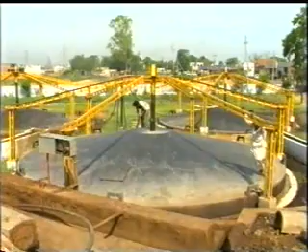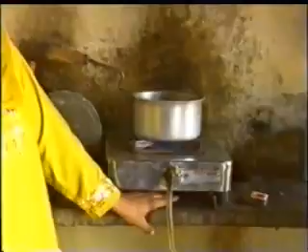With the rapid increase in population, there is a tremendous increase in the demand for energy resources to meet household needs in Indian villages. Still, about 60% of rural people depend upon traditional sources of energy, that is firewood, cow dung cakes, etc.

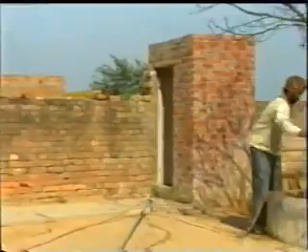Keeping in view the difficulties faced especially by rural women in meeting their energy demands, biogas technology can be an appropriate answer.

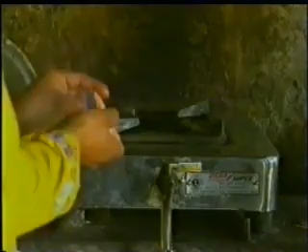Biogas technology helps us generate biogas from biomass, that is cow dung, crop residues, etc., which are available in abundance in rural areas.

Biogas is produced by anaerobic digestion. Anaerobic digestion is nothing but decomposition of cattle dung and other organic matter with the help of microorganisms in the absence of oxygen.

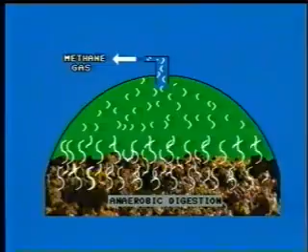Anaerobic digestion provides us methane gas for cooking, and in exchange for fresh-fed cow dung slurry in the plant, we get well-digested, valuable manure rich in nitrogen.

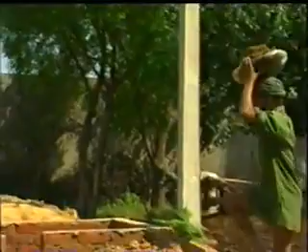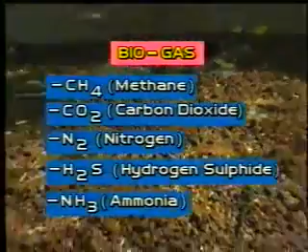What is biogas? Biogas is a mixture of methane, carbon dioxide, nitrogen, and some traces of gases like hydrogen sulfide, ammonia, and water vapor.

Biogas can be utilized for cooking and lighting, running diesel pump sets, and the outcoming slurry as manure in the fields.

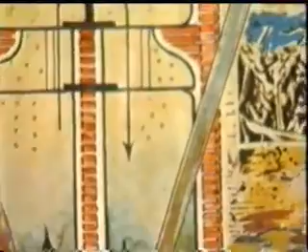On an average, biogas contains about 50 to 60% methane, 30 to 40% carbon dioxide, and traces of nitrogen, hydrogen sulfide, and ammonia. The digestion of organic matter can be done in two ways: batch digestion or semi-wet process, and continuous or wet process.

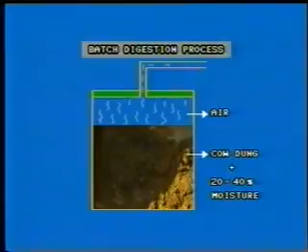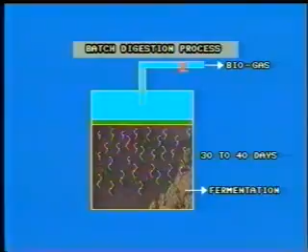Batch digestion. In the batch digestion process, the organic matter is filled in a suitable container along with some moisture. This container is then sealed to exclude air from it. The gas formation, which starts after 1 week, can be collected in centrally located gas holders and can be used for 30 to 40 days.

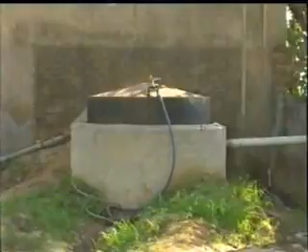Continuous process. In the continuous process, a single container serves as the digester. Each day, we add a required amount of fresh feed or slurry, and an equal amount of digested slurry comes out. It provides us gas continuously, and on the same principle, biogas plants work.

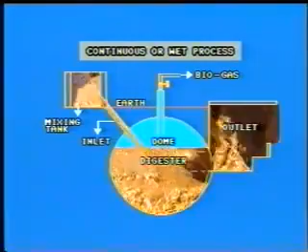Let us understand now what are the different factors that affect biodigestion: pH or hydrogen ion concentration, temperature, total solid content of the feed material, carbon-nitrogen ratio of the input material, retention time or rate of feeding, types of feedstock, stirring or agitation or mixing of the content of the digester, type of initial inoculum, and acid accumulation inside the digester.

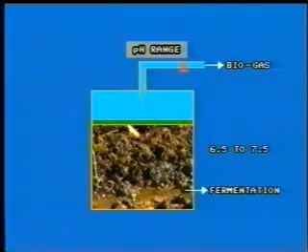Now let us understand these factors one by one. pH or hydrogen ion concentration: the digester is usually buffered if the pH is maintained between 6.5 and 7.5. In this pH range, the microorganisms will be very active and biodigestion will be efficient.

Temperature: the required temperature inside the digester for effective growth of microorganisms and biogas production is 20 degrees centigrade to 42 degrees centigrade.

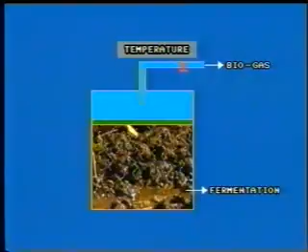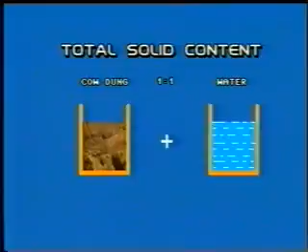Total solid content of the feed material: the cow dung is mixed with water, usually in the proportion of 1:1 by weight, to keep the total solid content about 8 to 10%.

Carbon-nitrogen ratio of the input material: the optimum carbon-nitrogen ratio is 30:1 for maximum microbial activity.

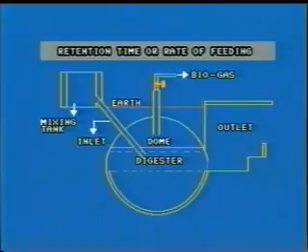Retention time or rate of feeding: the period of retention of organic matter inside the digester for complete digestion by the microorganisms is known as the retention period.

Retention periods for some feed materials are: cow and buffalo dung 50 days, night soil 30 days, pig dung 20 days, poultry droppings 20 days.

Type of feedstock: all plant and animal wastes can form the feedstock for a digester. However, woody materials are avoided to keep the process of digestion smooth.

Stirring, agitation, or mixing: breaking the scum or matted formation at the top of the digester is necessary for enhancing gas generation.

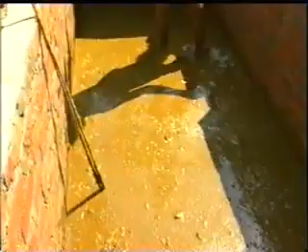Types of initial inoculum: the initial inoculum is the biodigested slurry collected from a well-established digester. It helps in providing a sufficient number of microorganisms.

Acid accumulation inside the digester: some fresh plant matter added in excess may produce acids as intermediate products. Avoid adding excess fresh plant matter inside the digester.

Some family size biogas plants are the floating gas holder, commonly called KVIC type, with 1 to 10 cubic meter capacity.

Fixed dome, commonly called Janta type biogas plant, with 1 to 6 cubic meter capacity. Pragati model with 1 to 8 cubic meter capacity. Modified fixed dome called Deen Bandhu model with 1 to 6 cubic meter capacity.

The KVIC plant has a digester made of prefabricated ferro cement. The KVIC plant also has a gas holder made of fiberglass reinforced plastic with a 1 to 6 cubic meter capacity.

Flexi biogas plant with 1 to 6 cubic meter capacity, which is portable and made of rubber. Apart from this, community-sized biogas plants can be useful for a bigger community.

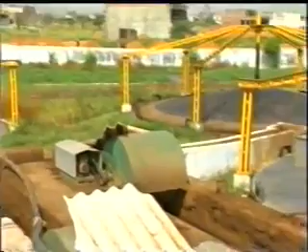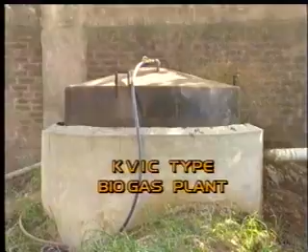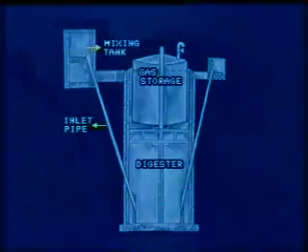Now let us understand the function and construction techniques of KVIC biogas plants. The KVIC, or Khadi and Village Industries Commission, type biogas plant consists of a mixing tank, an inlet pipe, digester, gas storage, center guide frame, outlet pipe, and an outlet chamber.

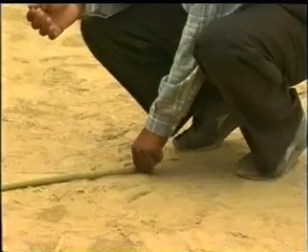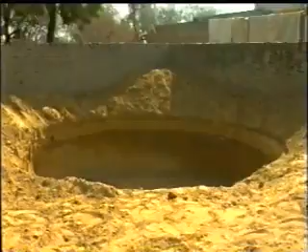Before construction, we select the right place for installation of the biogas plant. First, mark a line on the ground for digging a pit as per the size of the digester. For a 6 cubic meter capacity digester, we dig a pit of 10 feet diameter up to 8 to 10 feet depth. In order to lay a strong foundation, we do ramming of the brick bats with soil.

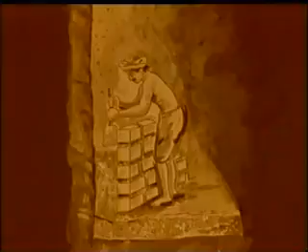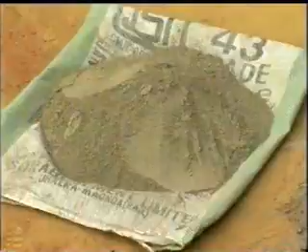The materials required are bricks, sand, stone chips, cement, and pipe for the construction of a digester, and we fix the center guide frame. An inlet and outlet chamber is constructed. The fabrication of the steel gas holder is done separately by a mechanic.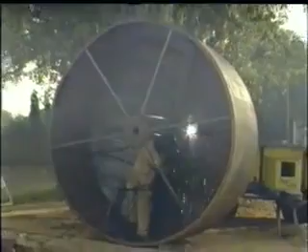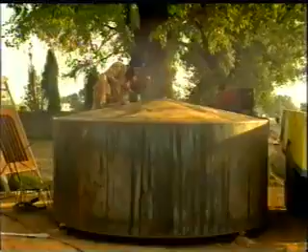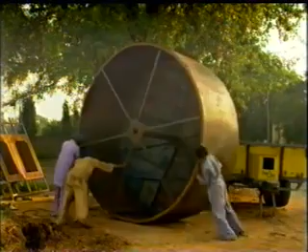Initial feeding with fresh cow dung slurry along with some digested slurry is done before fixing the gas holder into the biogas plant. We have here the views of a KVIC biogas plant user.

We are using biogas for cooking all items like chapati, dal, vegetable, milk, tea, etc. It is more useful than LPG. There is no danger in using this gas. The outcoming slurry is also used as good manure in the fields.

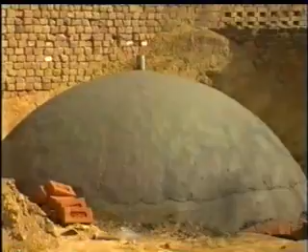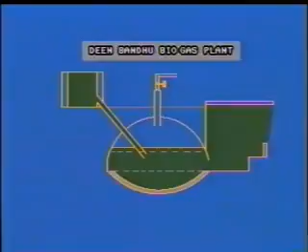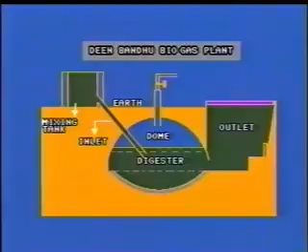Now let us understand the function and construction techniques of a Deenbandhu type biogas plant. It consists of a mixing tank, an inlet pipe, digester made of bricks, dome, and an outlet chamber. The digester cum dome is covered under the earth for its protection and to maintain temperature.

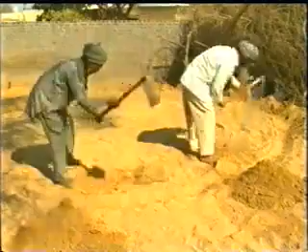Now for the techniques of its construction. First, we select an appropriate site and mark a line on the ground for digging a pit as per the size of the digester.

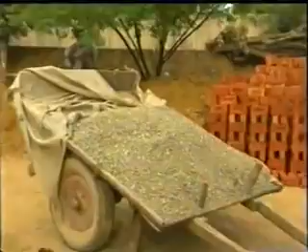Materials required for the construction are bricks, sand, stone chips, cement, and pipe.

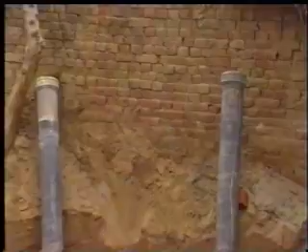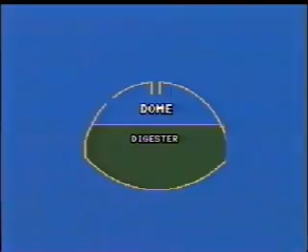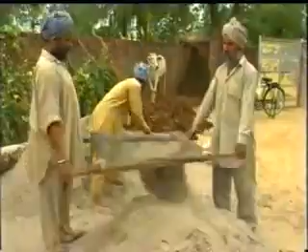In order to lay a strong foundation, we do ramming of the brick bats of 4 to 5 inches depth. Further, we prepare mortar in the ratio cement 1 part, sand 2 parts, and stone chips 4 parts.

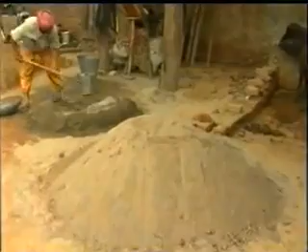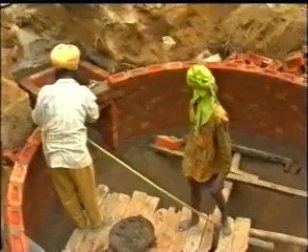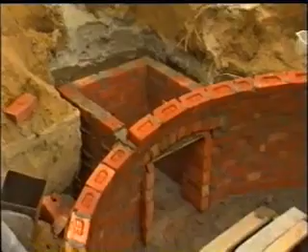Above the rammed foundation of the digester, a 3-inch layer of mortar is applied to stop any type of seepage. The digester is then constructed with bricks and it continues up to the dome. An outlet tank is also constructed along with the digester.

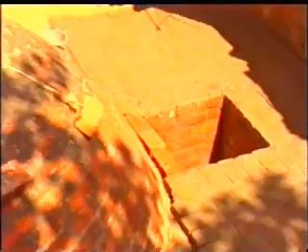In order to keep the radius equal all along the digester cum dome, we use a measuring stick. After a certain height, we put counterweights with hooks in order to give support to the arc-shaped wall for better stabilization.

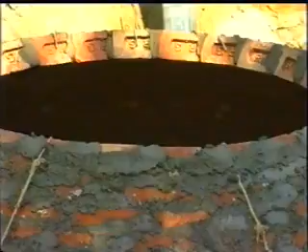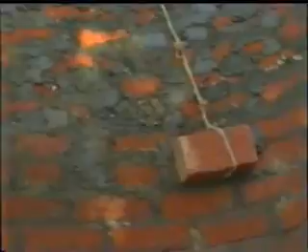We have the views of an expert about its construction. In the lower part of the dome, we use mortar of sand and cement in a 5:1 ratio, which is gradually reduced to 4:1 and even up to 2:1 at the top of the dome.

We use full-size bricks in the construction up to half the dome. As we go towards the upper part of the dome construction, gradually we use three-quarter, half, and even quarter size bricks as the circumference of the dome reduces.

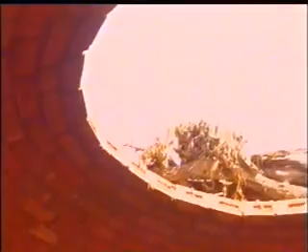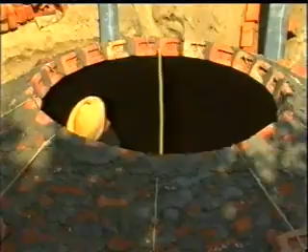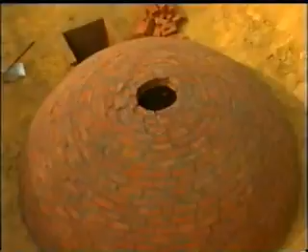The radius is always kept constant by regular measurement. Thus, the dome is constructed. Here, we can observe the different sizes of bricks laid at the top in different layers.

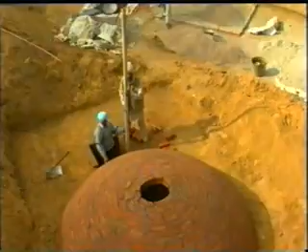At the top, a template or shuttering is done and a gas outlet pipe is fixed with concrete.

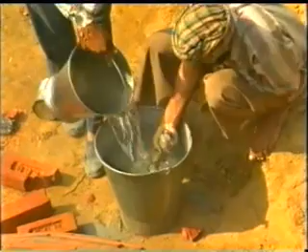After the completion of the dome construction, we apply slurry of cement in order to fill up the gaps or any hole.

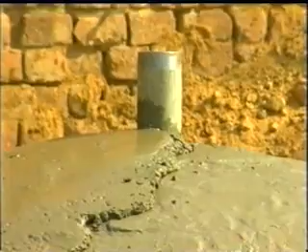Then, a 1-inch concrete layer is applied over the dome. Similarly, a 1-inch layer of concrete is applied to the inner surface of the dome.

The full constructed biogas plant is covered under the soil for its protection from the heat and cold.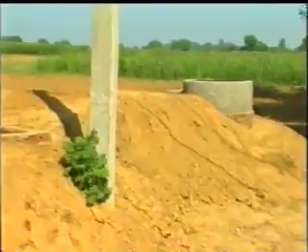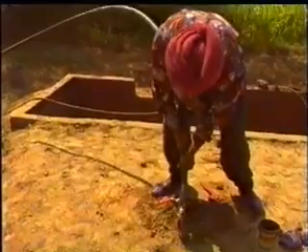Now, a pipeline connection is given up to the kitchen. The plant is ready for initial feeding, which is done through an outlet chamber. Here, we see a local technique of initial feeding with the help of wooden shutters.

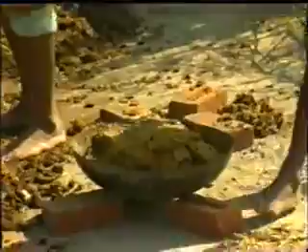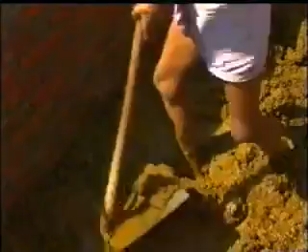A bulk amount of cow dung mixed in equal proportion with water is fed from the outlet chamber. Within a week of initial feeding, regular gas production starts.

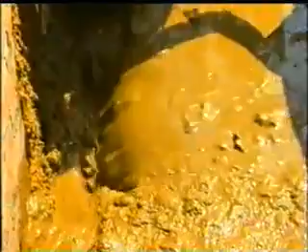Let us have the opinion of a user of the Deenbandhu type biogas plant.

My name is Gursev Kaur. I belong to village Benra. We have been using a biogas plant for the last 4 to 5 years. It is very useful for us. All our cooking is done on the biogas. Only in December and January do we require to use 1 cylinder of LPG, otherwise we use biogas for the whole year.

Chapatis for 10 to 15 people can be prepared within an hour. It is very cheap and useful. It is very safe. There is a chance of an LPG cylinder bursting, but not in this.

Now let us have some more views from the experts on biogas plant. Biogas plant has a very simple technology. There is no problem in understanding the repair and maintenance of a biogas plant even for a layman.

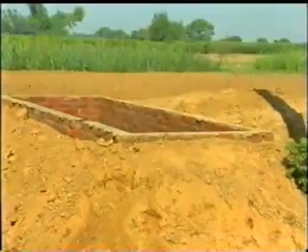Thus we see there is a big potential for biogas plants to meet the future demand of energy in rural areas. It is low cost and environment friendly. Biogas development programs will help in improving the sanitary conditions and quality of life in the villages. It can shape the path for self-sufficient villages in energy needs, which will lead to the sustainable development of society.